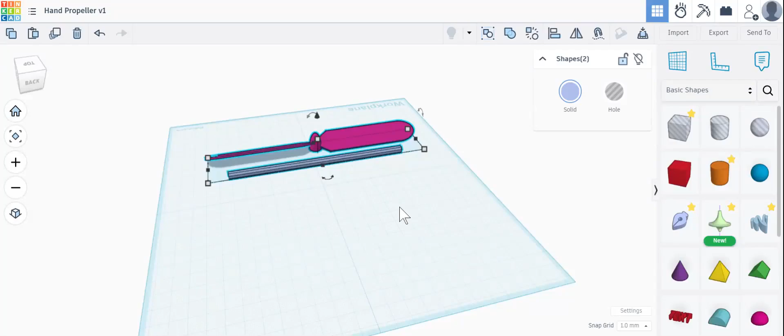We're going to do our hand propeller design. This is the first version, very simple. Looks like the ones you'd get at a birthday party, or some cheapo toy. But it's kind of fun to make and design and change it up.

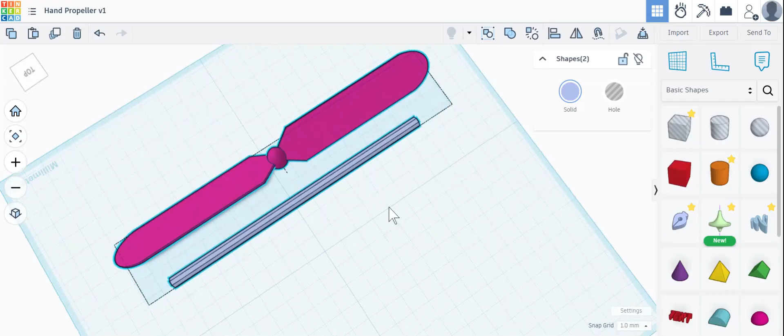But this one's pretty simple because it needs no supports if we design it this way. And we'll talk about that based on certain settings.

You can change the angle of attack here so that the air is getting pushed down differently, and you might need supports, and that's okay. But this is very minimal supports needed and pretty simple.

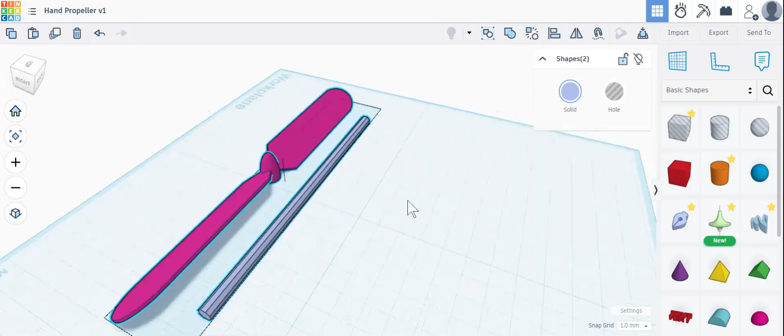So let's go ahead and hit Control H. We're going to hide that, and then I will show you how to build this.

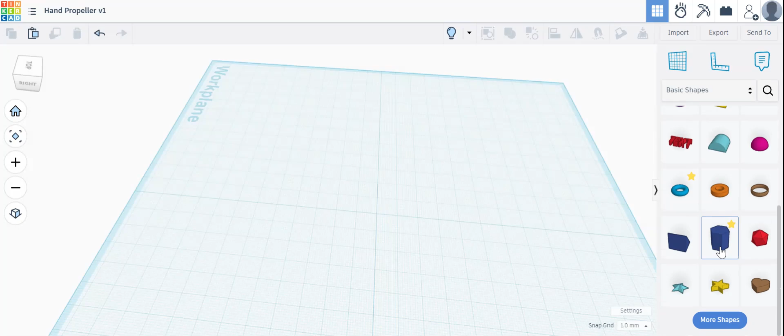There's a few different ways you can get the shape. You can use Revolve Sketch, which is a little more detailed, so we'll wait for that one for later. We are going to end up using the sketch tool, and then you can use this guy if you want for the center. You kind of stretch it out, a half sphere.

Or there's a couple other designs you can use, more shapes. You can use this guy. So just depends on what you want. We'll go ahead and go with...

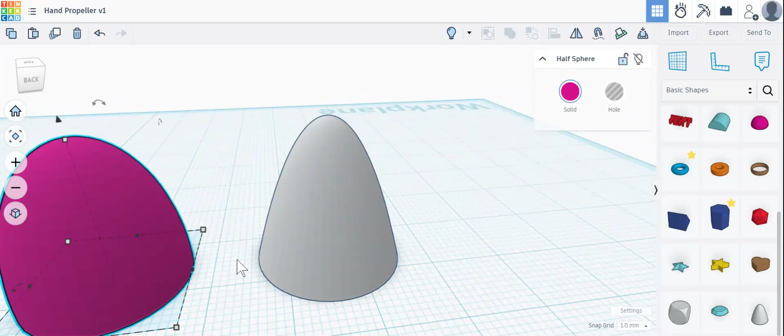Well, let's go with this one actually, which is our paraboloid. So for the particular one, well, it's actually — oopsies, Control Z. Oh, darnations. For this particular one, we have just a few shapes.

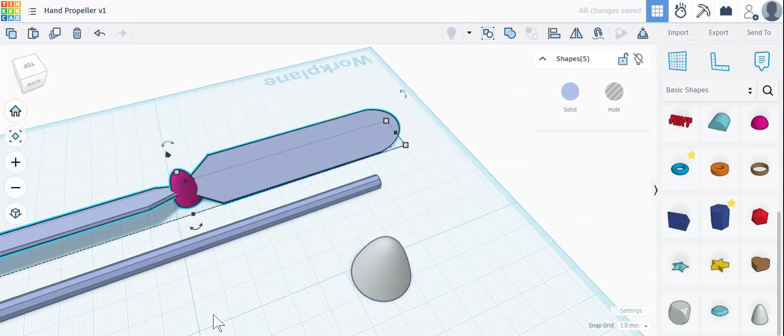If we ungroup all these, it's actually only 5 shapes. This is the shape we're trying to get, 10 by 10 by 15. Something pretty small. So 10 by 10...

By 15. You could make it different, and I'm now realizing I probably stretched out this guy.

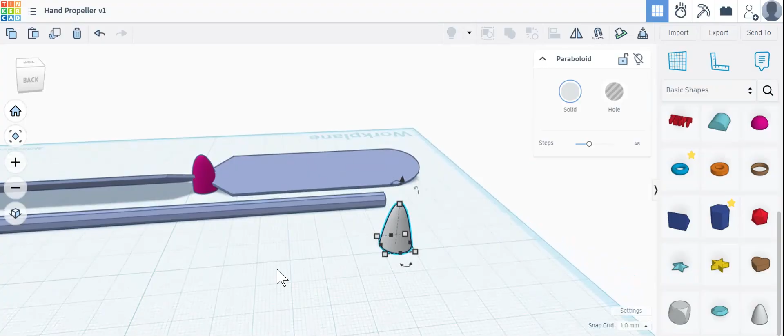But this one, let's try a different shape. Okay, but you could make it something different, but you're basically just a spot to connect the two wings here. These guys are going to be, it says extrude, which just basically means it's a sketch.

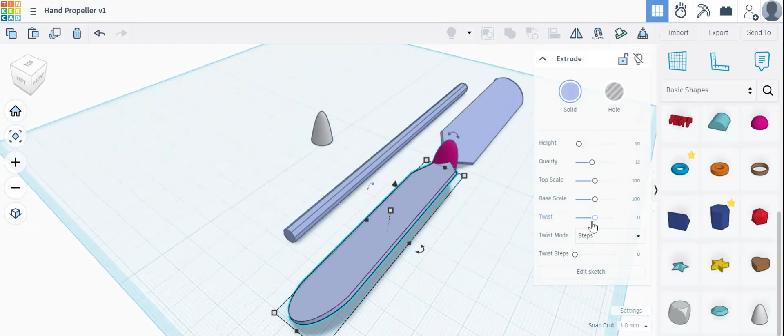So there's a couple things we can do for that. So we come to the sketch tool, we go ahead and throw that down. We're going to make these relatively small.

But we could do, so let's do like 5 millimeters. 1, 2, 3, 4, 5.

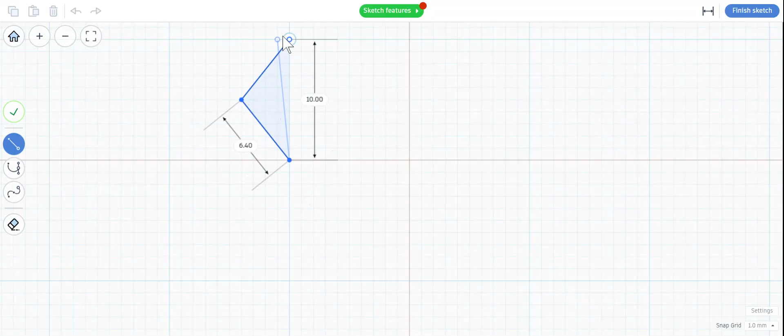This direction. So it comes back 1, 2, 3, 4, across 5. I'm counting these little dots down here, and then back down 5. Okay, we can come down to here.

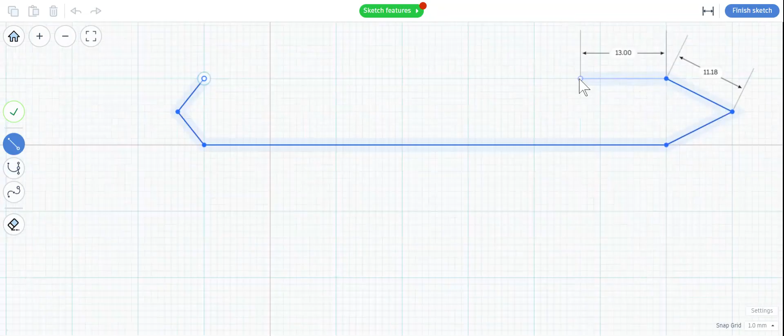Let's call it 70, and do something similar on the other side, but we're actually going to go 5 in, but we'll go all the way 10 across to kind of give us this little earmark thingy. And then we'll make it 70 on the way back.

We're going to use this tool to select these two, hold shift so you can pick both, and then we're going to round it. So that gives us this rounded tip, which is a little different than the one we have. You could stretch it out, you can make it smaller, bigger, and kind of get that there.

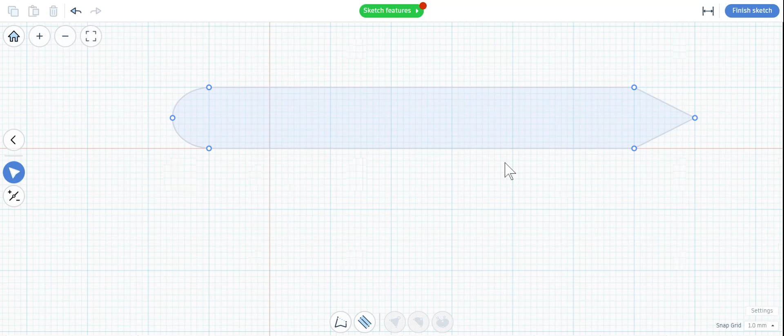Okay, we're going to go ahead and finish our sketch. It's so fat, this is unnecessary. We need to make it 2 millimeters. No, actually, we can go to 1. I think we're going to go to 1. We're going to go to 1 millimeter thick.

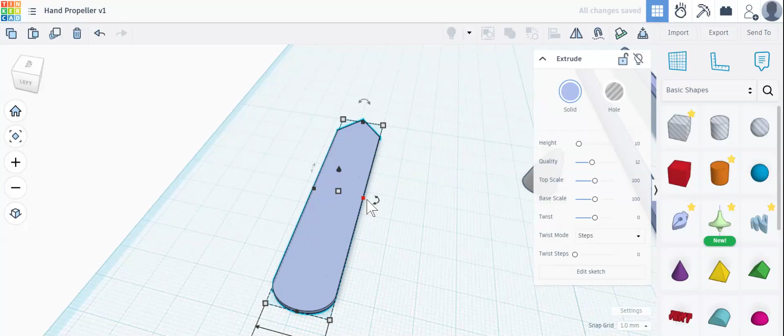Okay, we want something small. For this particular one, we want it to be a little wider and maybe a little longer. Let's go with 2 centimeters across.

It looks big here, but in real life, 2 centimeters is very small. 20 millimeters is what's showing, so it's rounded up.

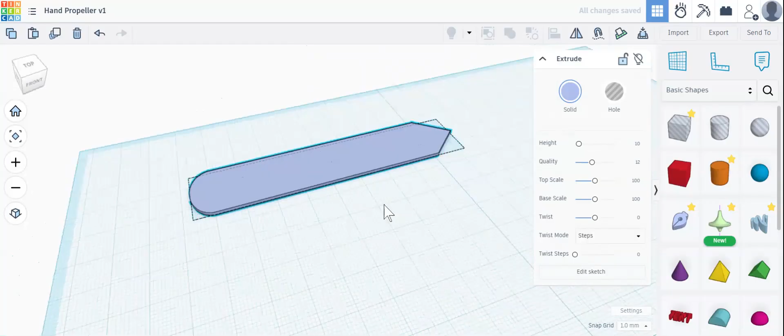We can do 100 here, stretch it out. Sure, this should be pretty decent. Okay, so we can use this little center to kind of attach it.

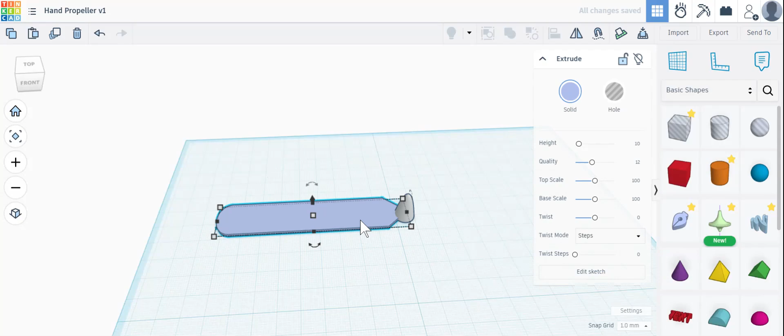You kind of see here, we're going to just go ahead and duplicate it, which I pressed Control D to duplicate. Then we'll mirror it like this, and then we'll — oops, just grab the wrong one.

We'll kind of line these up. We don't want them to be together, but we're going to grab it, hit L, center them.

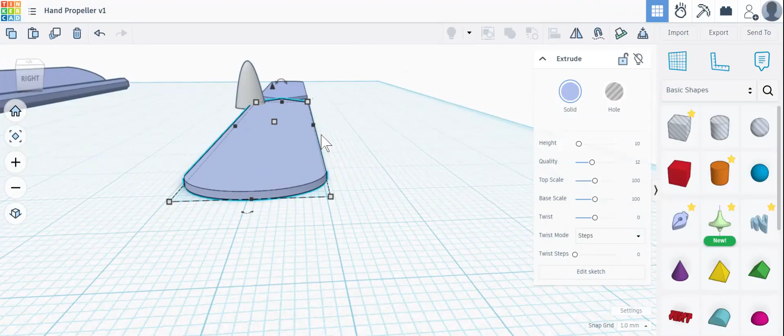Okay, so most printers, and the Bambu printers that we use, are going to print around 30-degree angles. 45 might be even easier for the printer, but this is kind of too steep for the propeller.

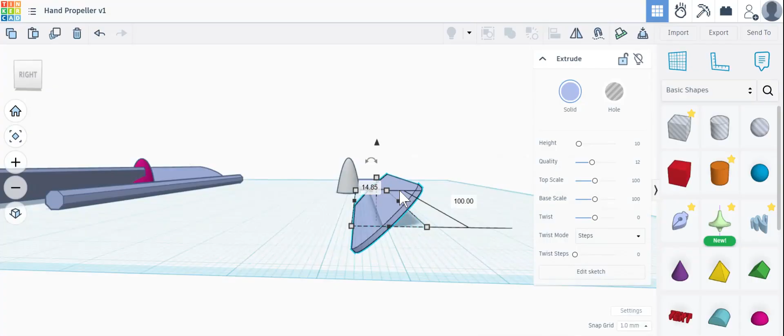So the wind, or as you spin it, the air is going to be hitting and going down. We don't want too steep of an angle because it's going to slow it down more than it's going to push the air down. So it's kind of fighting against itself. So you've got to kind of find the sweet spot.

For the printers, that sweet spot is kind of — let's go this way — going to be 30 degrees because you can print it without supports. And, oh, all right, come on, buddy.

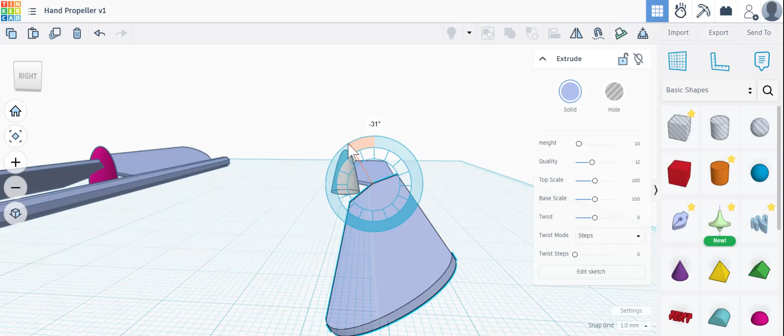You can print it without supports, press D, so it's on the base plate.

But at the same time, you're going to have a good attack angle. So we'll go 30 the opposite direction. So you saw the last one was negative, this one's positive.

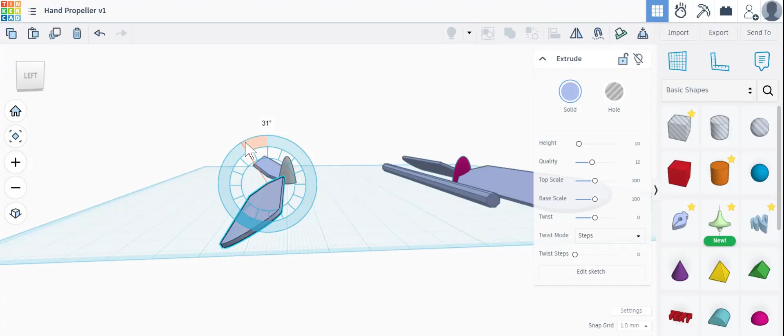That's what you want because you want them spinning in opposite directions. So as it's spinning, zoom, zoom, the air is going to be hitting and being pushed down and creating lift.

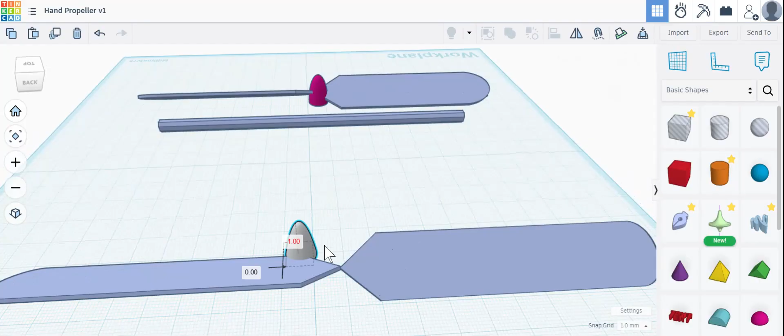You could probably do a smaller attack angle, obviously, if we add supports, but this is a simple one without supports. Before we do this, let's go ahead and group these together so they're one shape.

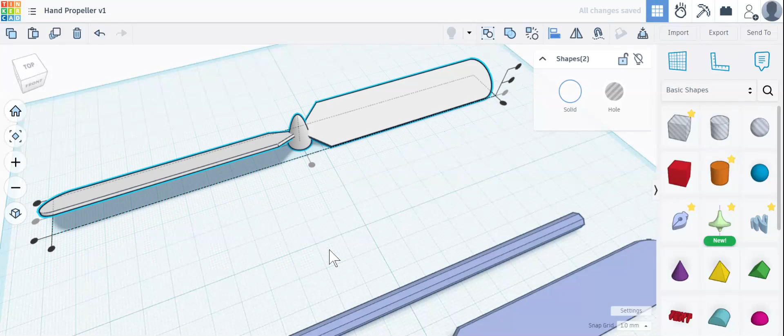Let's make it white. Now we can go ahead and center these and center this. This might need to be just a tiny bit bigger based on where it's at. Okay, now 15 by 15, this is probably actually okay.

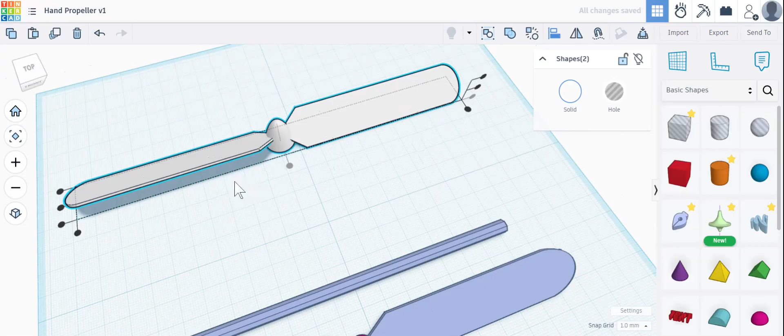It gives it some inertia, some zoomies, some spins. Okay, center, we hit L, center. This should work, kind of give a nice look at it from the top. Looks very symmetrical, that's what we want. You don't want a weird lack of symmetry. So this should be okay.

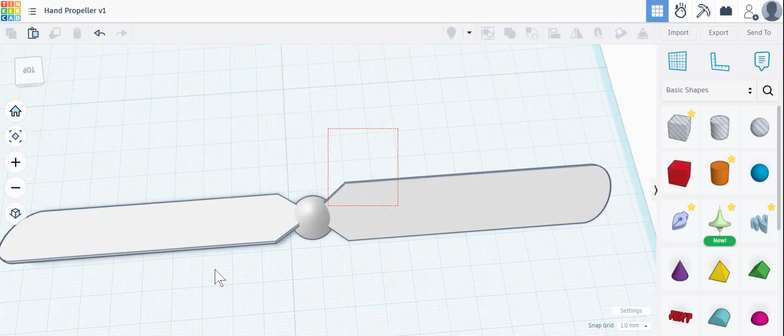So we will go ahead and then we can group that. Now for the handle, the handle could literally just be a cylinder. This is actually plenty fine, it's just a little harder to print.

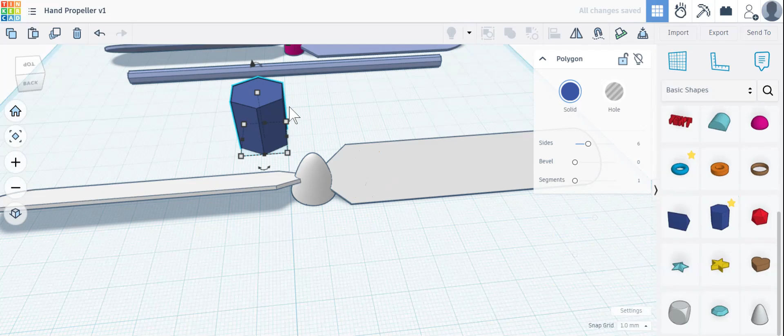So we could do polygon, we could choose the sides. It can be 6-sided, it could be 8-sided. I think for this particular one I decided to go with 8 sides because then you can lay it nice and flat. So we change the sides to 8.

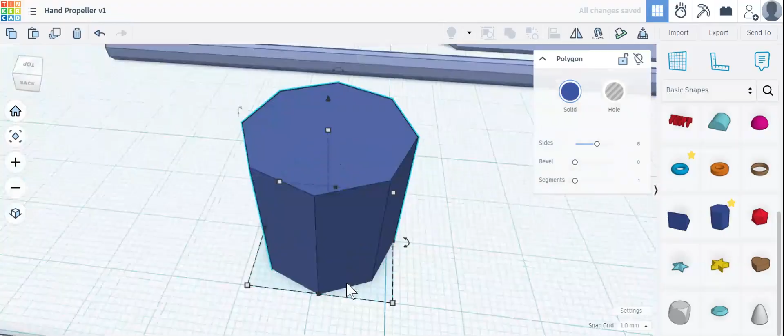We change the sides to 8. Huzzah. Okay, the problem that happens sometimes is I want to tilt it down to tip it on its side, so we're going to have to change the angle. Luckily it's one little chunk, 22.5.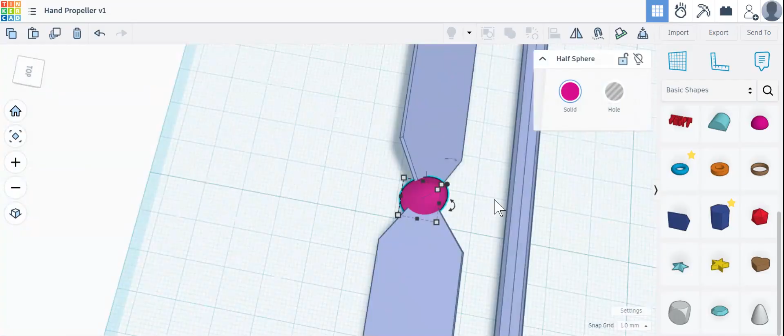Okay, we want this to be a hole for inside here so we can attach it, you can see that. So we're going to make it smaller. Probably the problem with these polygon shapes is you have to hold shift, if you don't want to mess up the symmetrical of it, you want to kind of hold shift and shrink it down to the shape.

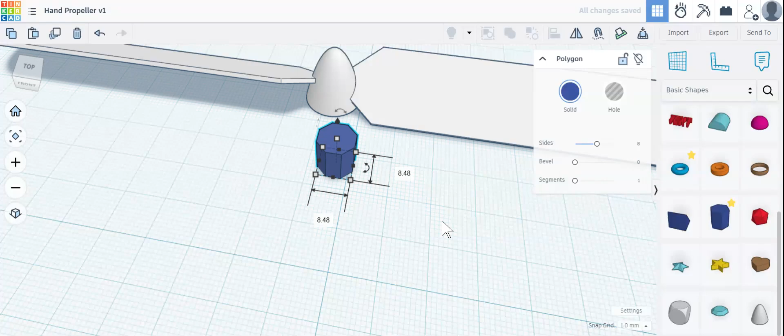I think with the octagon it's a little easier. With the hexagon it's a little weird because hexagons have kind of this abnormal shape, but once you turn it to the right angle, it's just a whole rigmarole with the hexagon. So the octagon is actually easier.

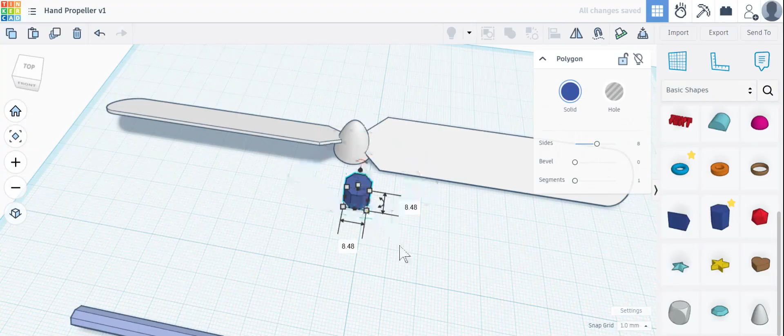Let's go ahead and make the hole. I think we should probably make it at least 10, that feels heavy. Let's go ahead and make it just a hair under, so 8 by 8, 8 by 8 should be fine. Just a hair under the centimeter mark. And then this is only 15 tall, so we're just going to attach it in there, not very deep, so maybe 6 millimeters.

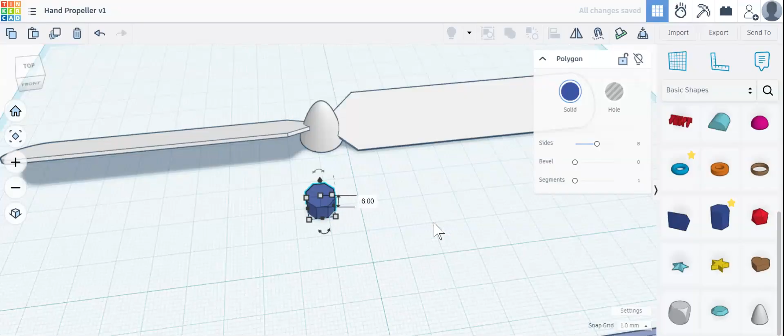This is going to be, we're going to press H to change it into a hole. Let's hit Control D real quick, I want to duplicate this shape because that's going to also be our handle. Group it. All right, group. Center.

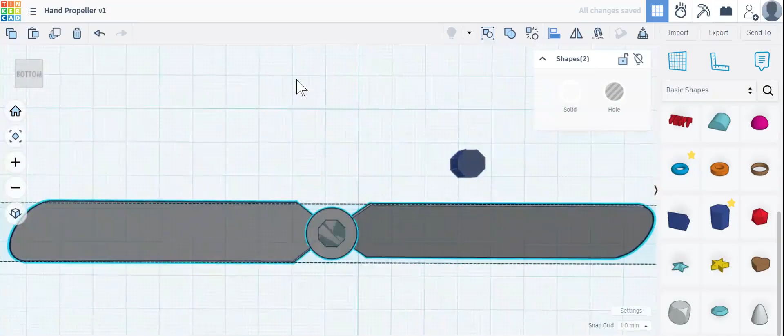Okay, double check, looks great. Now we union group one more time, don't do the bundle, do the group. Okay. Huzzah, okay, now we have a nice little hole, perfect to attach our handle.

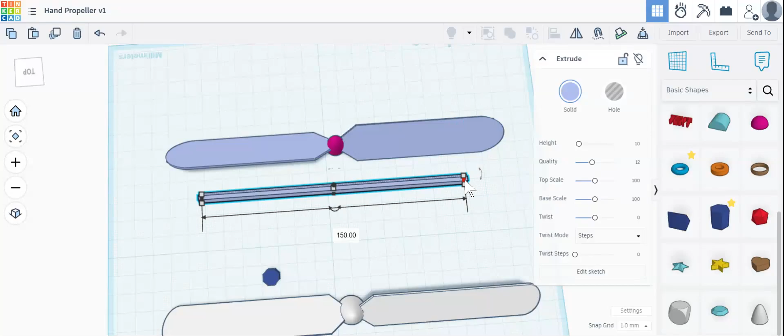The handle, you want it to be long enough that you're not whacking your hands. This one's 150, so that's totally good. All right, so about 15 centimeters is what we have here.

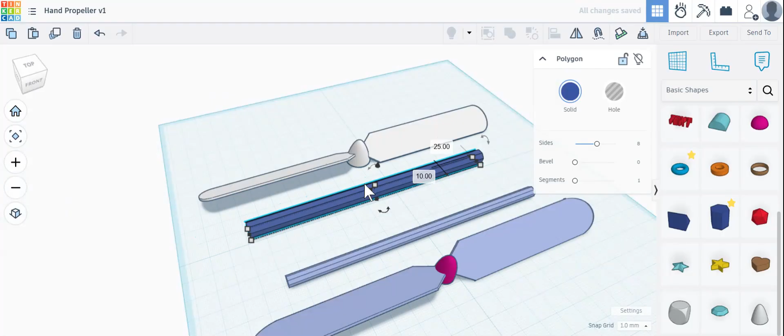Let's hit D so it's on the build plate, and then we will extrude this out to 150. You could do longer technically, but we kind of made this one thicker, so it's actually going to hold it down better. You do want, weirdly enough, a little bit of mass lower than the blades. If you don't have a lot of mass, like if we hollow this out or make it very, very small, it actually makes it very unstable.

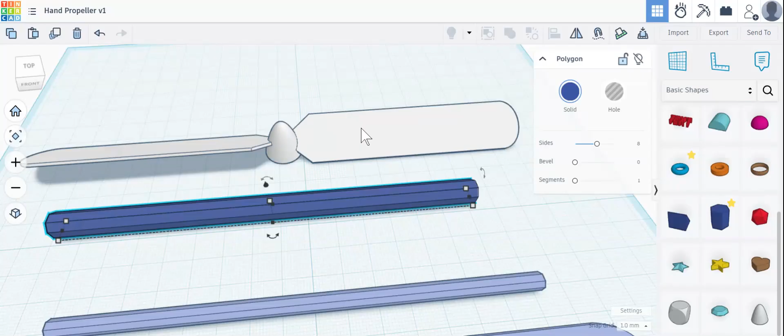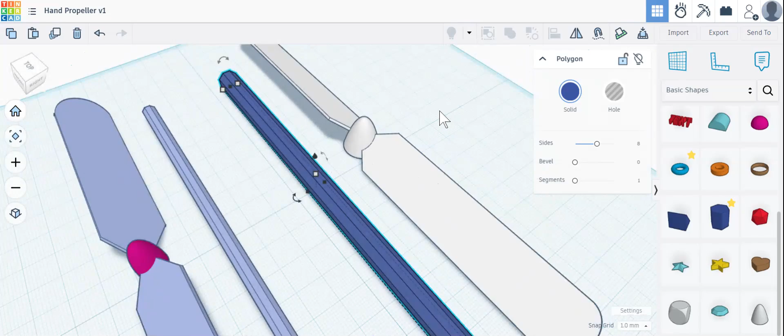The center of gravity is too high and it flips over, it's a weird little thing with spinning things where it'll flip over. So you want some mass lower down, so this is going to add that lower down mass. We probably could have made it a scooch smaller. You guys can change the drawings, the shape in the middle, all that, but this is the same basic premise for any little hand propeller toy.

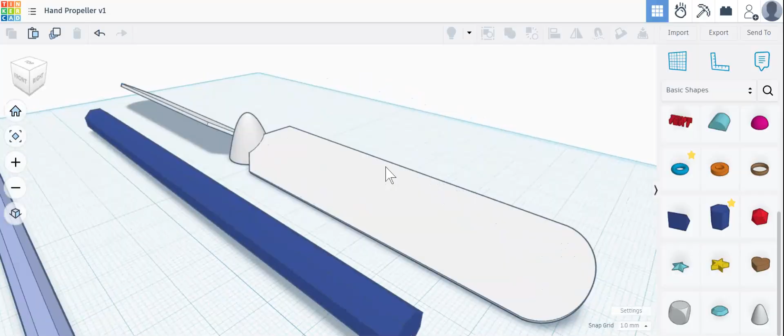And this should work just fine. You could throw it on the printer with very minimal supports, you might actually, I mean this would be no supports. You might have a tiny little brim just to kind of hold this down on the build plate. If you don't want to have a tiny little brim and you have a really nice sticky build plate, you could, in theory, do another little slicey dicey.

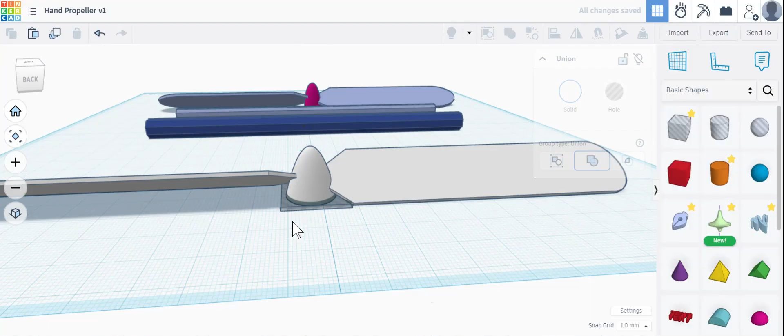We take this guy and maybe we just go down to 1 millimeter. Okay, and then we bring this over, and then we stretch her out.

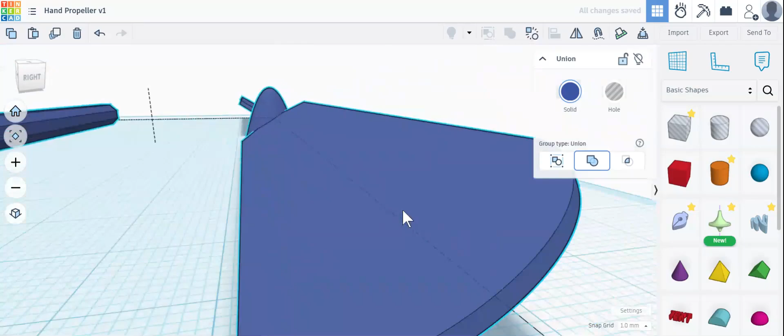Then we go ahead and group that. Oopsies, I accidentally grabbed that, it's probably okay though. So now you have a little bit of... oh okay, then we gotta drop it. Shoot, but we grouped the wrong thing, ungroup. Shoot, okay, we want to just group these two. Group.

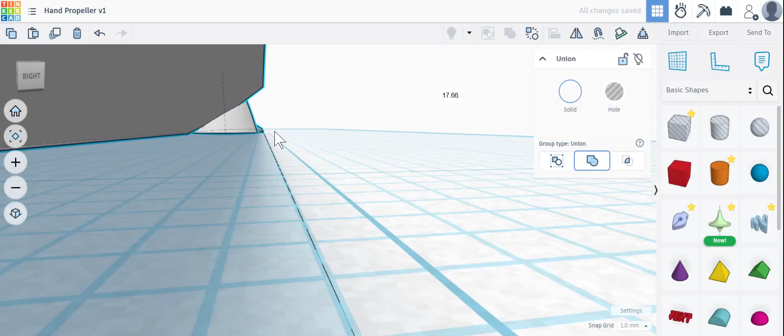Okay, so now you have what should be flat. So if we drop it, it kind of sits a little bit more on the build plate. You're probably still going to need a brim, but you could kind of hope and pray that this little 1 millimeter section sticks and it can build up from there, and it might actually work without any brim or any supports. We'll check it here in a minute.

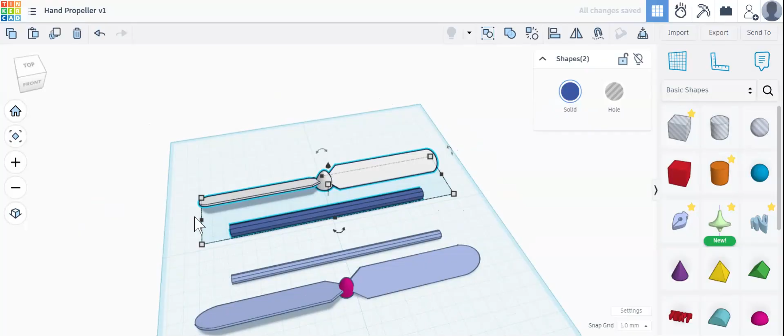But that's the basic hand propeller tutorial. Pretty simple, and this is very fun to play with. It's a first fun attempt at the design, that's why we call it version 1. We can adapt, change it, but you are going to need some beefy blades.

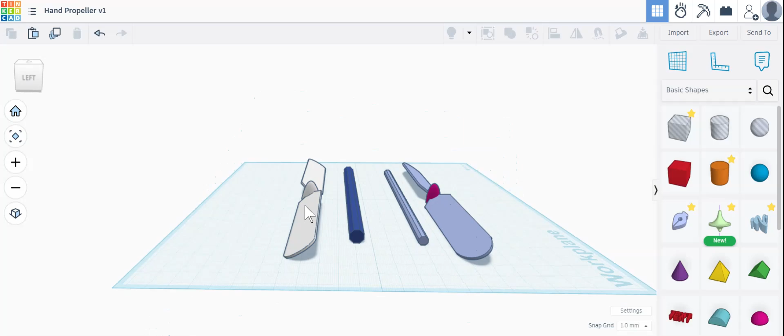It's kind of an early problem, too thin of blades, or trying to make it too thin. Not enough lift, so we have the wrong angles and things like that. So this is kind of the first starter getting in there. It's a good start.